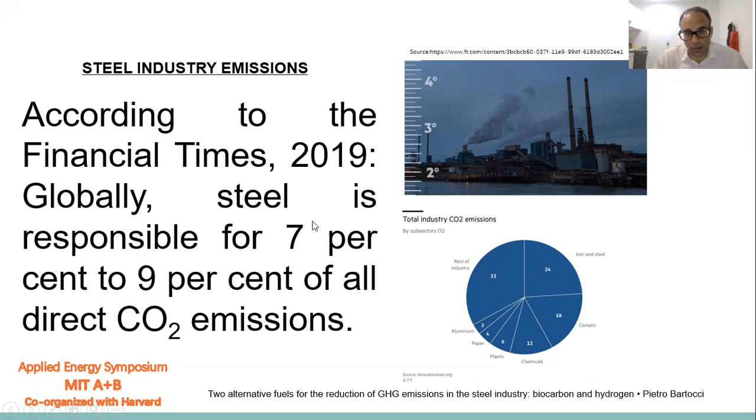What we present is a two-phase solution: the use of hydrogen and the use of biocarbon. Biocarbon can be a solid fuel for the substitution of coke, leaving the bulk of the technology quite the same. While for hydrogen, we switch from blast furnaces to electric arc furnaces, which should be fed with directly reduced iron.

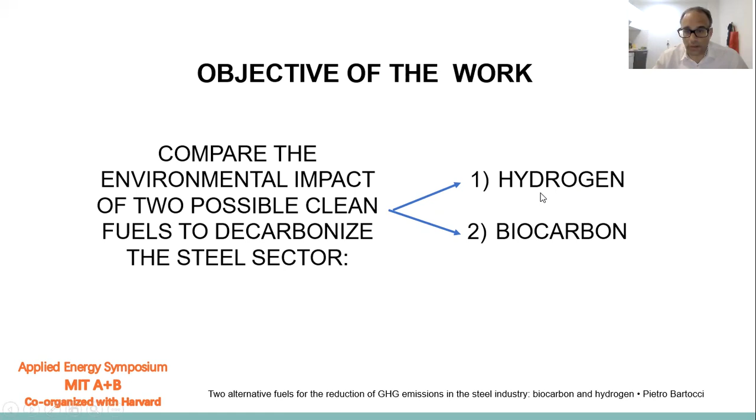So we should have a first step of direct reduction of iron through hydrogen. And then we should operate an electric arc furnace, which can use, for example, carbon or the same biocarbon as a fuel and a reducing agent.

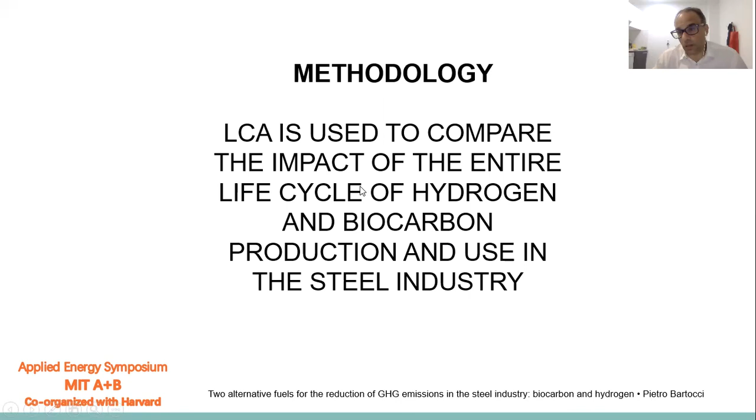So the methodology is based on LCA, which is performed using SimaPro software and the Ecoinvent 3.5 database. The impact which is analyzed is more or less the carbon footprint, because as we have said, the problem is the greenhouse gas emissions of the steel sector. And the two fuels are compared on the basis of a functional unit, which is the kilogram or the ton of steel produced.

So coming to the LCA of biocarbon steel, this is the biocarbon which we produce in our lab through a collaboration of the University of Perugia, SINTEF Norway, University of Agder, and Huazhong University of Science and Technology, situated in Wuhan. All these experiments aimed at producing a fuel which had low porosity.

To decrease the porosity of the biocarbon, we first practiced pyrolysis, then we mixed the char with the liquid pyrolysis oils, and we pelletized the mixture, trying to push the pyrolysis oil inside the pores of the char and to make them mix and act as a binder in the pellet production. Then the produced pellet was reheated to facilitate the polymerization of the liquid bio-oils inside the charcoal porosity.

And so in this way, we believe to have a better fuel which has a higher strength and also reduced porosity. The porosity influences the reactivity of the charcoal, which comes to approaching the one of coke.

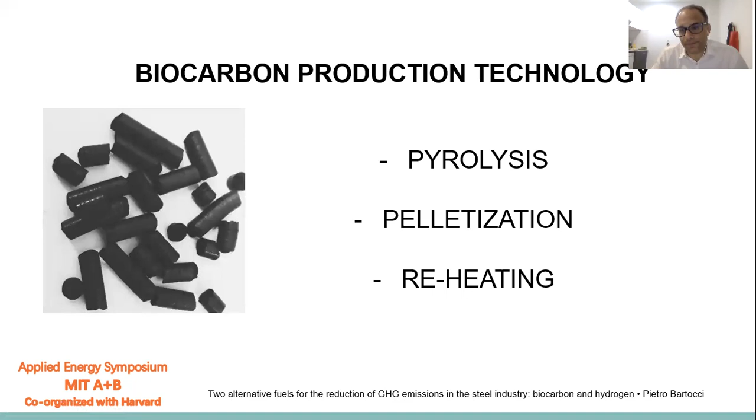So this was the plant we developed, which we have already presented in the previous edition of this conference, the MIT A+B conference 2020. And we have mainly first pyrolysis, then mixing and pelletization, and then reheating, as we already said.

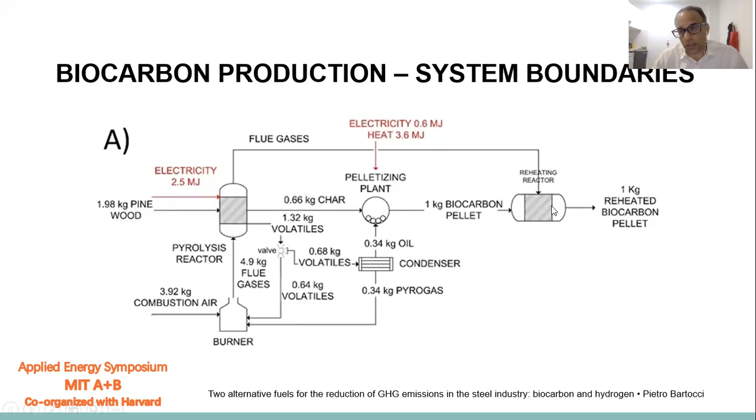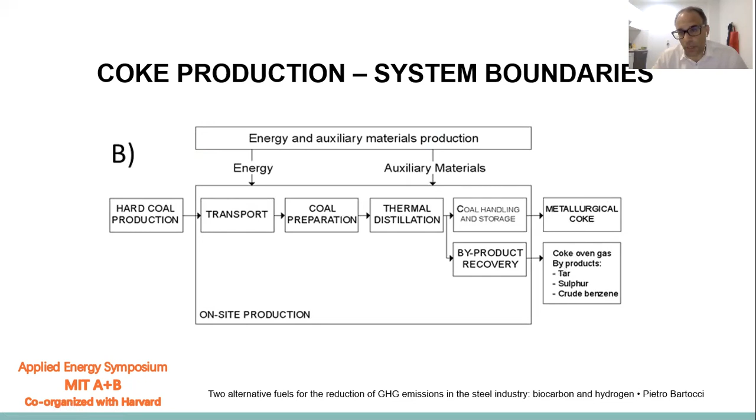Then we used once again processes taken from the Ecoinvent database on steel production, and we just substituted the produced biocarbon for the coal. So we tried to decrease the use of coal almost to zero in steel production, and substitute it with biocarbon.

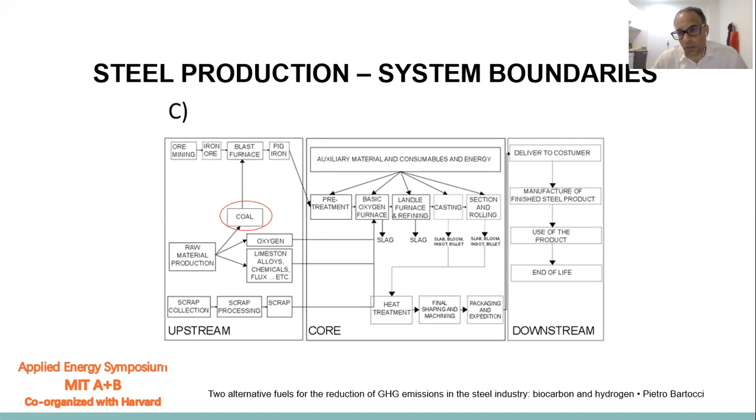What we obtained as a result is a decrease in the final carbon footprint of... this is the comparison of the carbon footprint of biocarbon and coke, and contrary to what we can expect, the average biocarbon emissions are higher.

This can be evaluated in many ways. We can consider, for example, that these emissions are mainly due to biogenic carbon dioxide, so they are not taking part in the fossil fuel greenhouse gas emissions.

And we can consider that some emissions are due to the fact that the pyrolysis plant itself consumes energy and electricity. So the efficiency of the pyrolysis process is not always good. Also, if we take into comparison the production of coke, producing coke through coal pyrolysis is more efficient because we have higher yields, because coal has less volatiles than biomass.

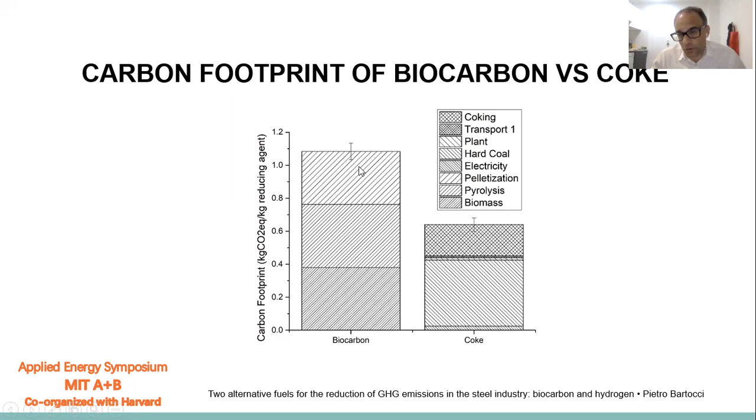So if we do a pyrolysis process to produce a solid product, it is obvious that the yields of coal will be higher than those of biomass. So this explains why the emissions per kilogram of produced final solid products are higher for biomass.

In the final steel production we have a higher emission for conventional steel, because, as we said, when we come to the combustion of the final product, coke has important emissions of greenhouse gases, while biomass emits almost no carbon dioxide, because we release what the biomass has previously absorbed during its growth. So the actual reduction of the total emission is about 31%, which is interesting.

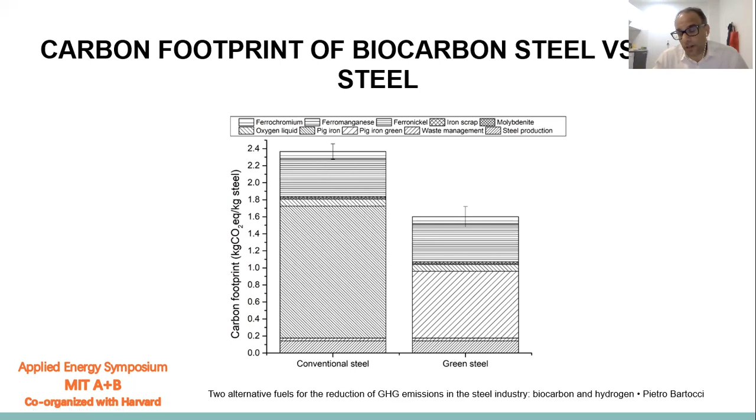The aim of the study is to compare, or have a preliminary idea of, the reduction which can be obtained using also hydrogen. For this sake, we consider the study of Bhaskar and others in 2020, which is a study of the University of Stavanger, Faculty of Science and Technology, Institute of Energy and Petroleum Engineering.

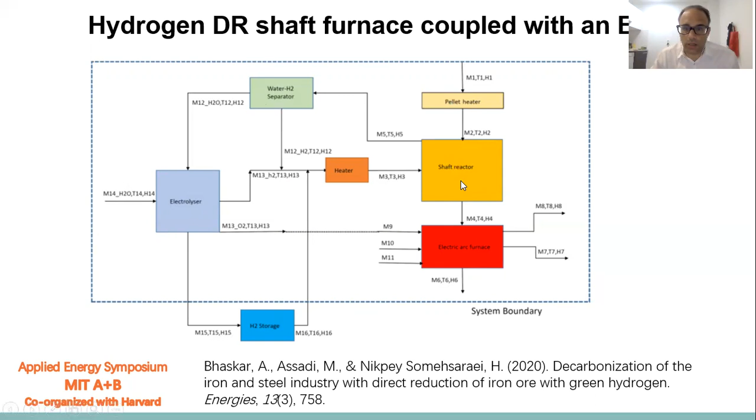So in this model, we see that hydrogen is produced with an electrolyzer. And it is used for direct reduction of iron pellets, which are heated at a temperature of 800 degrees. This is not to overcome this threshold of 800 degrees, because above 800 degrees we could have sintering. And then, as we said, we have the electric arc furnace.

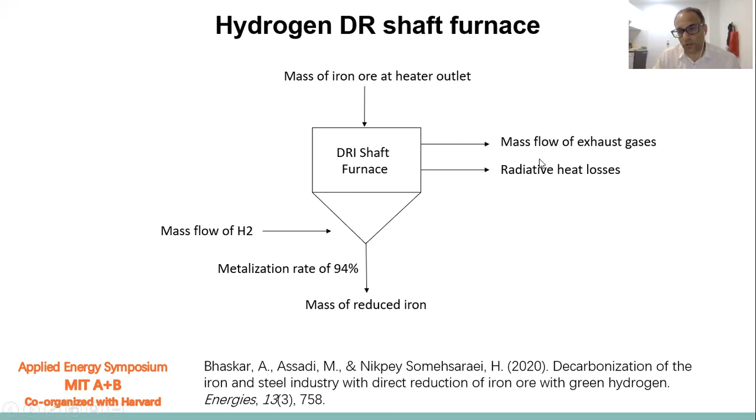These are the mass flows of the direct reduction process, which maybe is the most interesting. And we see that it is performed in a furnace in which iron and hydrogen are in counter current. And the metallization rate of iron is 94%. This means that the metal iron which exits the reactor is about 94% of the metal that entered the reactor. The mass flow of exhaust gases is represented by unreacted hydrogen and steam.

So finally, the results of this study performed in Norway show that the average EU carbon dioxide emissions per ton of iron produced are around 1,000 kilograms of CO2. So if we compare with our previous study on biocarbon, the final use of hydrogen could reach a reduction in CO2 emission of 50%. We have to take into consideration that in this study, some of the assumptions are different with respect to our calculation on biocarbon production.

Because these calculations are mainly made with the electricity consumption and the heat consumption, while the facilities also imply emissions. So we have to think that the facilities needed to produce, compress, and transport hydrogen, and also the furnaces needed for the processes, can have significant emissions, due to the fact that we can substitute coke with biocarbon in an already existing plant, while in this case, we have to make a completely new plant.

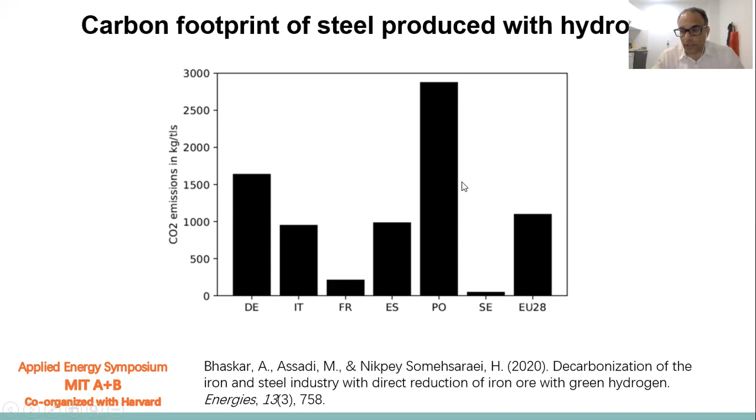Coming to the conclusion, biocarbon can be produced from the pyrolysis, pelletization, and reheating of biomass. Steel produced from biocarbon can reduce its carbon footprint by about 30%. In principle, reduction of emissions using H2 for direct reduction of iron can be higher than 50%. So here we see a comparison of what we can consider A technology against B technology, because this will probably come in the future. And greenhouse gas emissions for hydrogen direct reduction of iron should not consider only energy consumption, but all the emissions due to the new facilities which are needed for this innovative project.